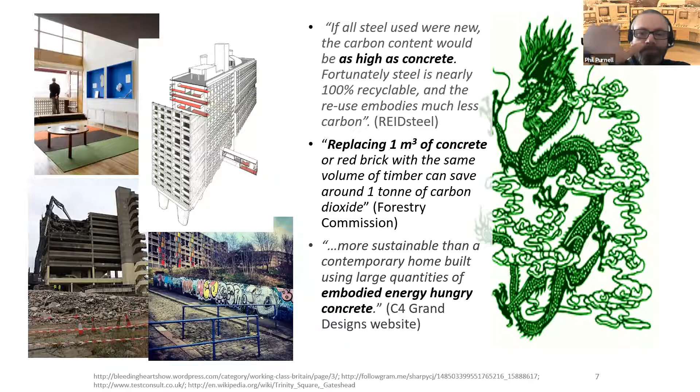So some numbers, apologies for maths at this time on a Monday morning. But if we look at all the stuff we make as a species, in the last year for which numbers are available, we made somewhere in the region of 40 gigatons of products, and that includes pretty much everything you can think of.

In the process of producing these products, we released about 37 gigatons of carbon dioxide or its equivalent in other gases. If we look at how that's split amongst the major construction materials - reinforced concrete, steel and timber - we can see that over half of that material was actually concrete. Over half of everything we make as a species is concrete, and anything made on that scale is bound to have a large footprint. We can also look at the equivalent numbers for steel and timber.

If we look at the amount of carbon dioxide emitted associated with each of those materials, we can see that although we make 22 billion tons of reinforced concrete and about 1 billion tons of steel, they release almost exactly the same amount of carbon dioxide. So although we release a lot of carbon dioxide through the manufacture of concrete, we also release an awful lot of carbon dioxide through the manufacture of steel and timber.

If you normalize these figures - the graph on the right - according to the amount that's actually made, dividing the CO2 released by the amount of material made, you can see that from a carbon intensity point of view, reinforced concrete is amongst the lowest carbon materials we use as a species, while steel and timber are very much higher carbon materials.

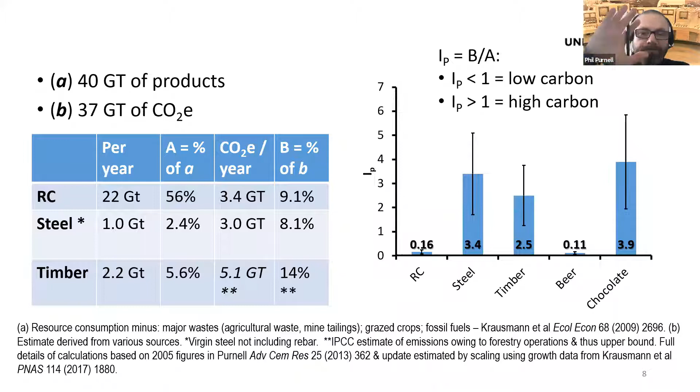The way we look at these in a more intelligent manner is to make sure that we invoke something called functional units. A functional unit simply reflects the actual function that material performs, rather than just thinking about it per kilogram or per meter cubed or per year of production.

There are some quite complicated graphs on the right here, but all they demonstrate is that it's considerably more complicated than this. In actual fact, there is no such thing as green materials, and we must look very carefully at how we use all materials.

In certain situations, for example, timber is clearly the lowest energy and lowest carbon material, and steel is not. In other structural situations, concrete is very clearly the lowest carbon material, and steel is comparable with either timber or other types of concrete.

It's a very complex situation, and if we don't analyze at the product level, at the functional unit level, any analyses we do is likely to be at worst fallacious and at best vexatious. So it's very important that we analyze at the functional unit level. There are no such things as green materials - simply by saying you're using timber instead of concrete, you are not necessarily being green.

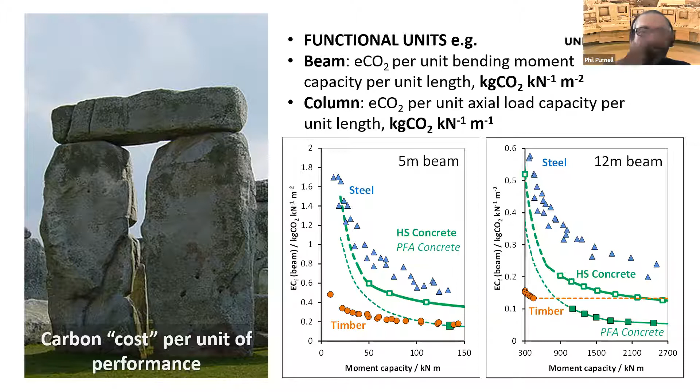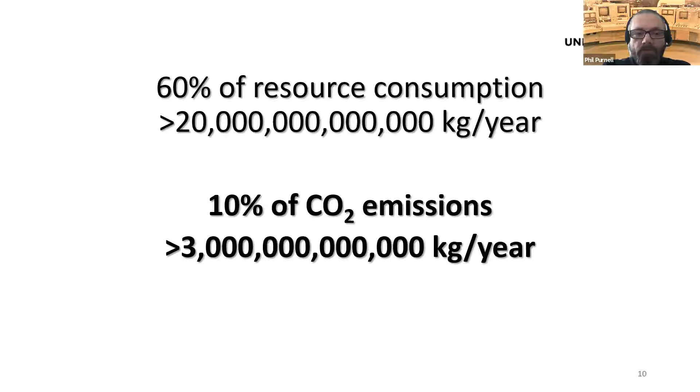Nonetheless, we must confront the gross numbers. The manufacture of concrete accounts for something like 60% of our resource consumption, and accounts for something in the region of 10% of our CO2 emissions. So regardless of what arguments we might make to say we use concrete very efficiently, these big numbers remain. Part of the job of this centre will be for Julia and her team to come up with practical and pragmatic ways in which we can reduce both of these numbers, not just the one at the bottom.

So how does this tie in with the circular economy? There's often a conception that the circular economy is primarily to do with recycling, not really to do with carbon. Well, that's not really the case. Carbon is very much tied into how we achieve a sustainable circular economy.

This process is hugely damaging. We talk about emissions from buildings, but the emissions from the materials used to make the buildings is of a similar order of magnitude. So it's important that we address it.

So what options have we got to reduce this generation of waste and depletion of resources and production of CO2? Option one is to make greener materials, and much of what we concentrate on in the concrete research industry is making greener low carbon cements. We'll discuss ways in which this can be done.

Option two is to recycle materials. This is very popular for many other materials and can be very effective, such as aluminium and steel. But it doesn't solve the problem because recycling itself is not energy free, and it doesn't address demand and consumption. You very often see in these systems considerable rebound effects.

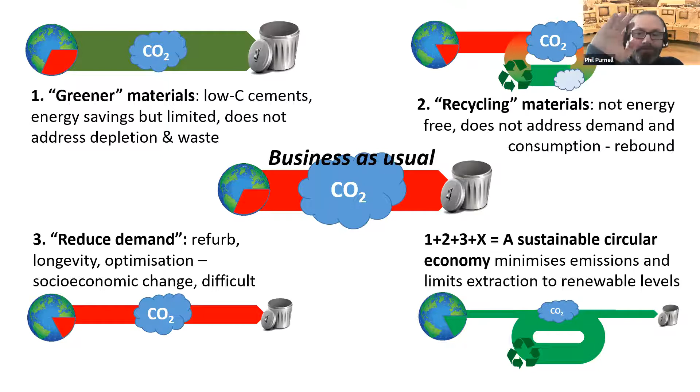Let's have a look at some of these in turn. So how do we go about less embodied carbon? Well, one way, of course, for many other materials is to use less energy.

But one of the fascinating things about cement manufacture, and by extension concrete manufacture, is it's already very close to its theoretical limits. If you do the enthalpy calculations for cement manufacture from its raw materials, you get down to about 2 gigajoules per ton. We're already very close to that. Because the process operates at such a scale, it's already been optimized very, very heavily.

Of course, the other half, or just over half, of the CO2 from cement manufacture comes from decomposition of limestone. So can we look for materials that aren't carbonate bearing in order to make cements with different chemistries? Because we know these cements exist - other calcium cements, calcium sulfate cements, calcium aluminate cements, and cements we can base on magnesium.

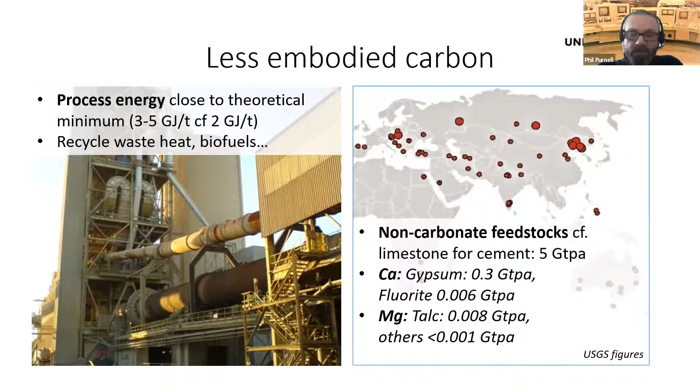But when we look at the proven reserves for the base materials, so after limestone, the next biggest calcium mineral is gypsum, and the next biggest is fluorite. These are produced at scales orders of magnitude below what we actually need to maintain cement and concrete production. So while these are useful clubs to have in the bag, they are not the whole game.

We're also very keen on adding things like PFA and GGBS. So we take other people's wastes where somebody else has already been made responsible for the carbon, and we mix this with our cement. This basically dilutes our cement and very effectively reduces the carbon footprint of the cement and the concrete, and also adds technical benefits as well.

But it's important for us to remember that the parent processes for pulverized fuel ash and GGBS are changing, and they're changing in ways that are actually reducing our ability to reuse PFA and GGBS in concrete.

We also need to be cognizant of the fact that these materials are only low carbon because of accounting factors. They're not low carbon inherently. It's just that we assign the carbon associated with their manufacture to their parent materials. Relatively small changes in that allocation could actually very quickly make PFA and GGBS effectively have as high embodied carbon as cement, or very close to it. So again, this is part of a solution, but not a whole solution.

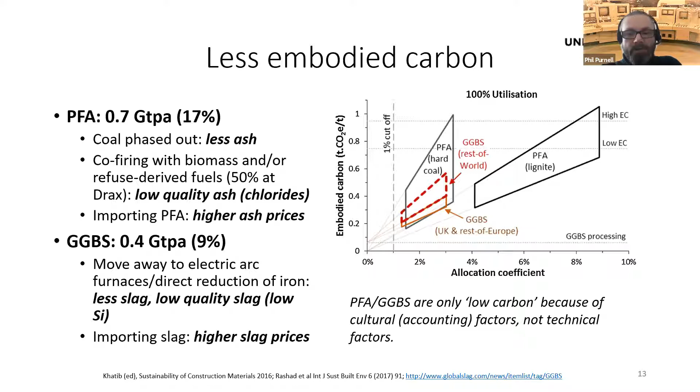We can look at the concrete we make already. Leon and I did some work over a number of years to look at how the embodied carbon of concrete varies as you change the mix design, without needing special cements or anything else. You can optimize your concrete mix quite carefully to get large reductions in CO2 without using new cements or replacement materials that can be difficult to get certification for. Thinking more carefully about how we use the concrete we specify can give us considerable savings, combined with savings we've spoken about before.

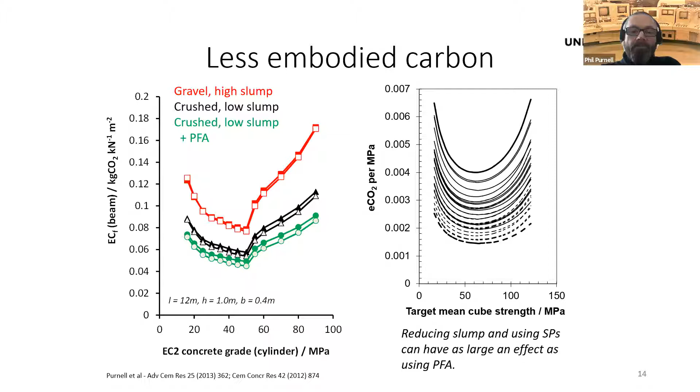Another thing we can do is simply use less concrete. So moving from option 1 to option 3 that we put on the earlier slide, how do we actually use less concrete? How do we reduce the demand for concrete?

One thing we can do is look at the concrete sections we actually build. Many of us will be familiar with instructing undergraduates how to make a reinforced concrete section. They take a loading situation from which they gain a bending moment diagram, look at the peak on that diagram, and design a section which resists that peak moment. Then we make a prismatic beam, designed to resist the same moment all the way along.

A very simple calculation demonstrates that if you optimize the depth of that beam to match the bending moment along its length, you can instantly save something like 20 or 30% of concrete. Put another way, 20 or 30% of the concrete in that beam isn't actually doing any work. It's just there because it's easier to make the beam that shape.

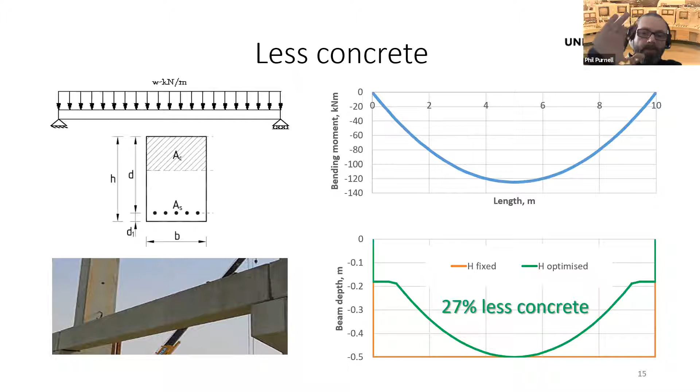And of course, we didn't always do this. This is not just a technical issue, it's actually an economic issue. If we go back to the early and later 19th century, it was perfectly common to design the shapes of beams such that their shape reflected where the bending moment is in the beam. If you look at structures from this period, you often see these 'hog's back' beams, as they're sometimes called. Why don't we do this now?

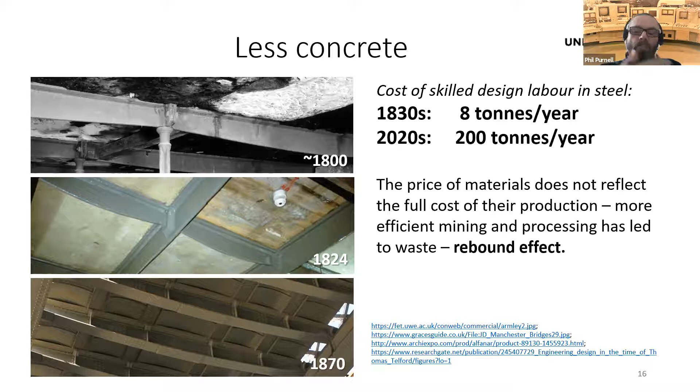It's because of the change in the ratio between the cost of skilled labor and the cost of materials. In the 1830s, paying the equivalent of a relatively newly graduated engineer would cost about 8 tons of steel a year. Nowadays, that would cost about 200 tons of steel a year to match their wages. This means the price of materials nowadays does not reflect the full cost of production. So more efficient mining and processing, rather than leading us to use less material, has actually led us to use more—a classic rebound effect.

Another thing we can do is look more carefully at how we reuse buildings themselves. Rather than constantly moving to new build, demolishing and rebuilding, let's look at what happens if we refurbish existing buildings. There's a big push towards so-called zero carbon buildings, which generally involve knocking down what's already there and building a very heavily insulated, carefully ventilated building. But although that saves on operational carbon—heating, air conditioning, lighting—it incurs a cost in new materials that have to be mined out of the ground.

When you look at the total carbon emitted over the lifetime of those buildings, the picture doesn't change very much. In fact, the jury is largely still out on whether it's more carbon efficient to refurbish existing buildings—saving on embodied carbon but losing a bit on operational carbon—or to build new buildings where the converse is true. So in the absence of other information, since we can't make a simple heuristic decision, as someone said before me: the greenest building is the one that already exists.

We should be pushing our materials towards those which help us refurbish our existing built environment, rather than digging new materials out of the ground and emitting more carbon to build a new built environment. Durability and maintenance are therefore key enablers for a circular economy. Building new buildings is sexy, but it costs a lot of carbon. Understanding how to do durability and maintenance is going to be a key plank in moving towards a circular economy.

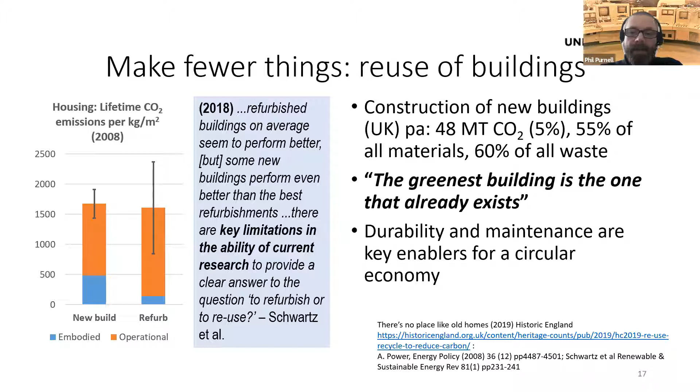It's silly season at the BBC, so this comes around once every 4 or 5 years. Many of you will have seen this report over the last few years, and they always illustrate it with this idea that somehow the Romans had a magic formula for concrete which, if only we could rediscover it in some fantasy novel narrative arc, we could make buildings that last forever. People should be alerted to the classic case of the US Naval Air Force reinforcing their planes and being told about survival bias.

We don't need to invoke magical materials. We have had, for many years, this is a graph from 1998, the design procedures, the technology, the knowledge of the material science and the chemistry to actually make sure that reinforced concrete buildings we specify nowadays are perfectly capable of lasting 200-300 years if they're properly maintained and properly designed.

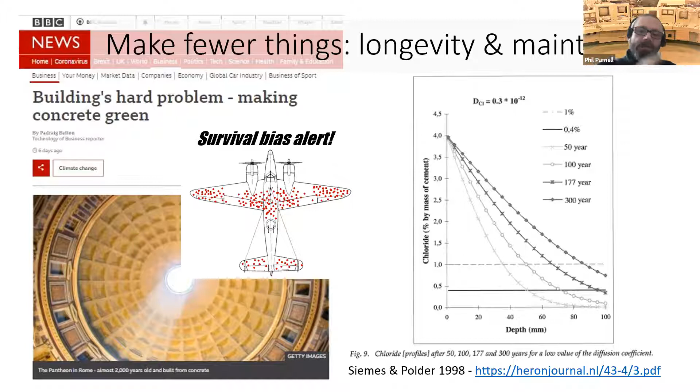One of the things we also perhaps need to move towards, because there will be times when we need to demolish existing built environment to make new built environment, is looking at ways we can reuse the components that make up our buildings. Because the value of the materials we use is not in their materiality, it's in the function they provide - their ability to resist axial load, their ability to resist bending moment. Understanding how we can reuse construction components, not just crush up and recycle construction materials, is going to be essential to moving towards a truly circular economy in the built environment.

For concrete, particularly cast in situ concrete, this is an Achilles heel because it's very difficult to dismantle and it's very difficult to understand what the properties of the sections are. I can tell you the properties of a steel I-beam with a tape measure and a textbook, but it's much more difficult to do that with a reinforced concrete beam where the steel is embedded in the concrete in ways that are very difficult for us to analyze.

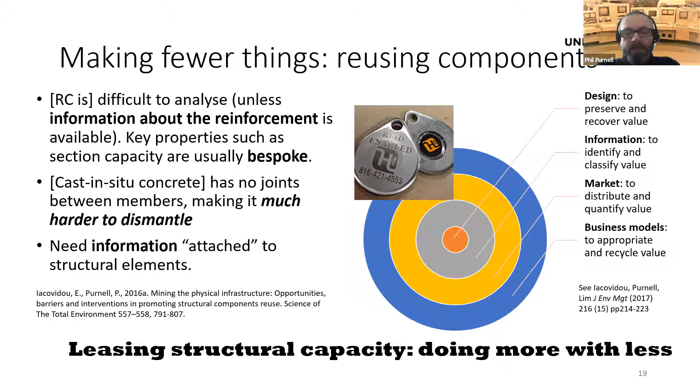In actual fact, the value in those reinforced concrete beams then switches towards the information we hold about these components, and how we can add value to them by understanding their residual capacity - so we could recover some of that high level structural value, instead of crushing it into aggregate to recover only some of that relatively low material value.

So that's a whistle-stop tour among some of the high level stuff that Julia asked me to address. The short answer is all of these things are equally valid - there is no silver bullet to moving towards a truly sustainable and circular built environment. But by looking at ways we can combine all of these different approaches, in a sort of British Cycling Federation approach where we make multiple incremental improvements, but also pushing the agenda much more strongly towards reuse and refurb rather than recycle - these are the ways we'll move to something approaching a sustainable circular economy for construction.

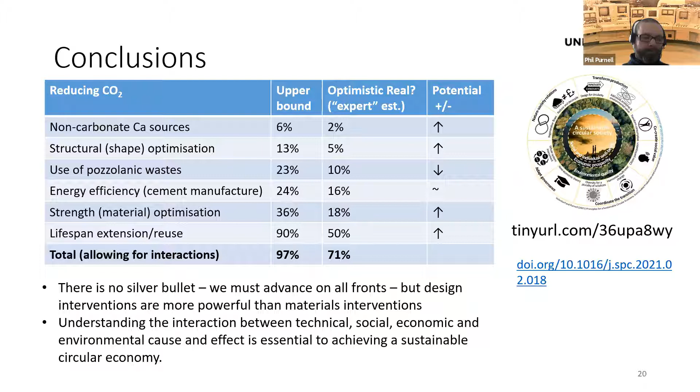There's a question: do you think there is a case for bio-based aggregates? That's an interesting one - I don't know is the short answer. There's always a case for these things, it's a question of whether we can actually make the case. My personal opinion is we probably have much better uses for many biomaterials.

So for those on the first launch this morning, there are ways we can add value to bio-based materials, making textiles, biofuels, depending on whether you think they're higher value. Some of the chemistry involved in making bio-based aggregates compatible with the highly alkaline environment within concrete probably means it's not the best use of biomaterials. Having said that, for many years people have used biofibers like jute and flax successfully in many countries to make lightweight concrete sheets. So there's always a case, but it's important to make the case based on a functional unit, not a heuristic. I hope that answers your question.

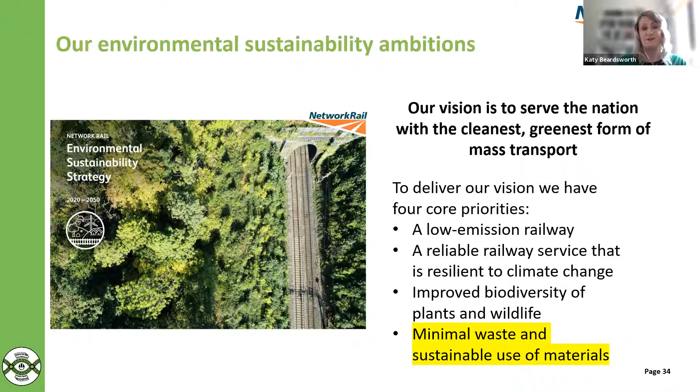We have some national functions or national service areas that cover the whole of the business, and I sit within one of those, a technical authority. So we have overall responsibility for policy, strategy, and several other areas.

Our business is devolved into regions. These regions run the railway day to day and also their own autonomous businesses as well, with interfaces with the national services. And at each level within the business, we have an interface with supply chain.

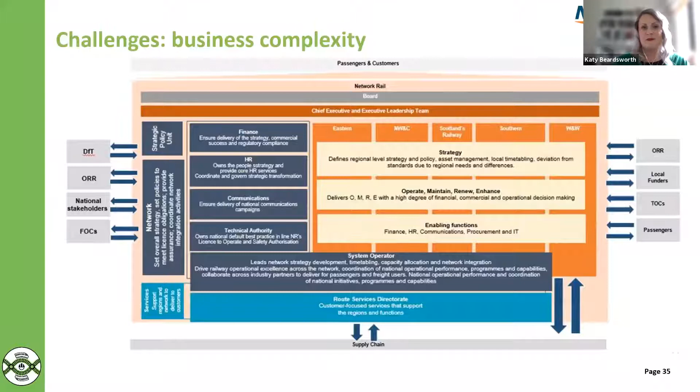So trying to change anything, update or innovate involves a lot of cross-functional working right across the business. It's very, very difficult to understand who you need to speak to, and at what point you need to speak to them. So there's a lot of challenges internally making that work.

Also, our business's understanding of circular economy. Probably even the wording we've ended up using in our strategy doesn't help awfully, but when you bring circular economy up generally within the business to people outside of sustainability, you either get a blank look or they say, oh yeah, you've got to recycle more.

Obviously this is one area of circular economy, but ideally the last thing we should be doing is once we've done all the other steps and identified all the other areas. So I think we've got quite a big internal education piece to do to help our business understand what circular economy is, what it means for them, and what opportunities they have within their roles to start embedding these principles.

And a big challenge, possibly our biggest challenge, are our safety specifications, standards and approvals process. So obviously building railways, we have materials we need to use and they have specifications, and to change anything within this is quite a formal process you need to go through for most of the materials or processes we'd want to change.

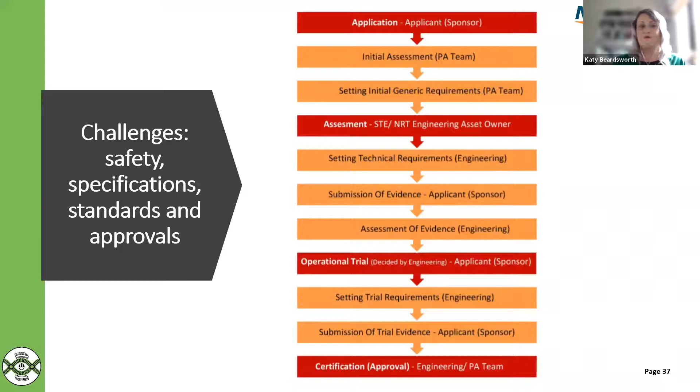So if we're identifying through our circular economy research that we should be using different materials or doing things in a different way, it's not going to be a simple case of, okay business, let's just crack on and do it. There will be many hoops to jump through before we get there.

And hot off the press last week, just to throw another complication in the works, the Williams-Shapps Plan for Rail was released. This is a rail review that was supposed to be published last year, but COVID put it back, and I think it's had quite a few rewrites.

But this basically sets out a vision to fundamentally change how the rail network works. In a few years' time, Network Rail will no longer exist. We will be brought under the umbrella of a new business called Great British Railways, and this will mean changes to probably everything that we do in the way we do things.

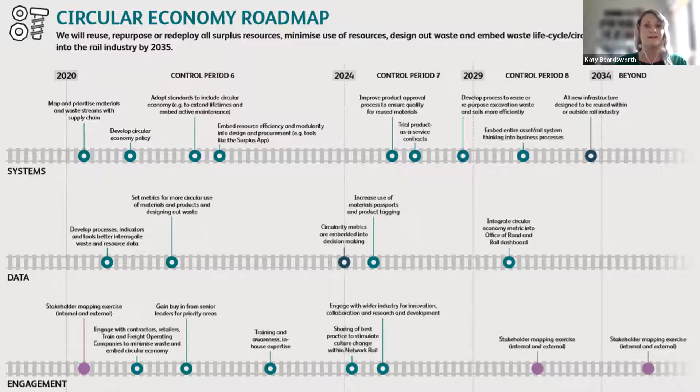So we've got quite a few things we need to do before we can get to that stage. We've got to map and prioritize our materials, and do a lot of work with the systems and processes we currently have to update them. I see a lot of opportunities with what this centre is trying to do in helping us along that journey.

So for my last slide, I wanted to touch briefly on some of the projects we're extremely keen to get involved with. We've had conversations with the project managers and people running these projects, because honestly, I see opportunities and possibilities with all the projects this centre is running, and I think there's going to be some really great stuff coming out of it.

But for these three in particular, Project 1A and 3D, we're hoping to be industry partners for and really embed that learning into our business. And with the eco-design of infrastructure, tunnels and bridges, we see a lot of overlap with what we're trying to do. So I think the centre itself is going to be a massive help to industry.

I think having industry partners is really key and a great way to do it, because it means we're not going to end up with some academic research that's published and nice, but really hard to translate into how we can use it in a business. It will hopefully be very much a collaboration approach, which means we've got the case study and information there to move forward with it as a business.

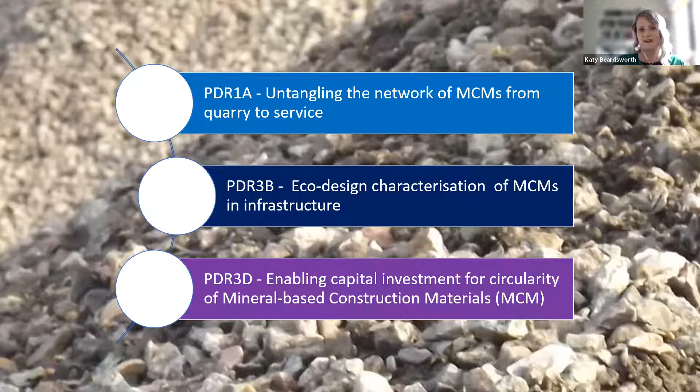So I'm really excited about the opportunities and what we can do together with this centre. And thank you, that is me. I'm happy to take any questions.

Right, thank you very much, Katy. It's a very interesting presentation looking at Network Rail and the circular economy roadmap. We're very delighted that Network Rail is part of the centre and working together specifically on the project she mentioned.

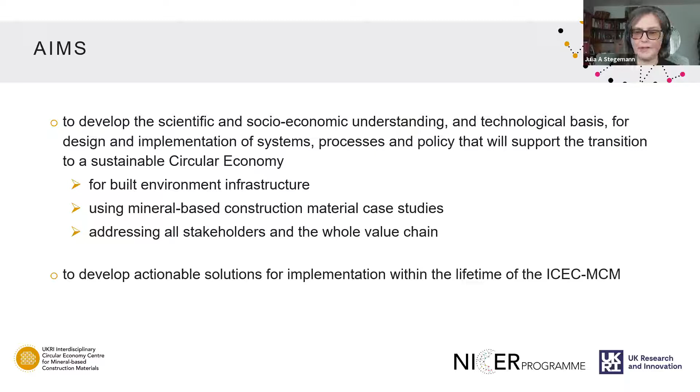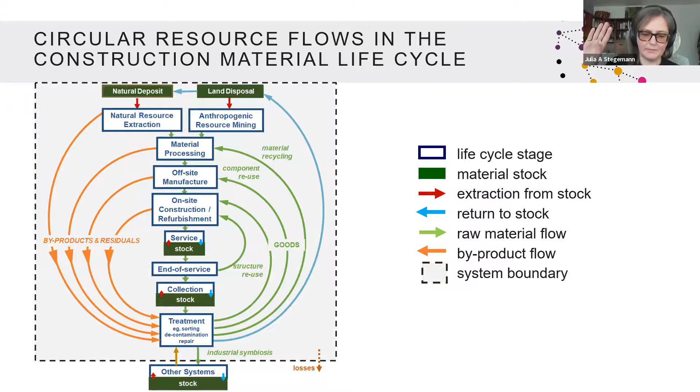Our research is organized according to 3 challenges. Challenge 1 is looking at material stocks, flows, and impacts, which relates to the arrows and green boxes in the previous diagram - the raw materials and the wastes.

Challenge 2 is the blue boxes in the diagram, looking at technical understanding and technical innovation for mineral-based construction material demand reduction, circularity, and impact reduction over the whole life cycle, for all of the life cycle stages.

Challenge 3 is about systemic enablers for circularity and addresses the whole system inside the black dotted line in the diagram. So I'm going to tell you a bit more now about challenge 1, and then Leon and Mohamed will tell you about challenges 2 and 3.

The research questions for challenge 1 are: what are the material flows and stocks of importance? Where are they located? What are their quantities and characteristics that we need to know in order to develop a circular economy with them? And what are their economic, social, and environmental impacts? We also need to know how these aspects change over time and in response to interventions we might make, which could be technologies, policies, or regulations, intended to stimulate a circular economy.

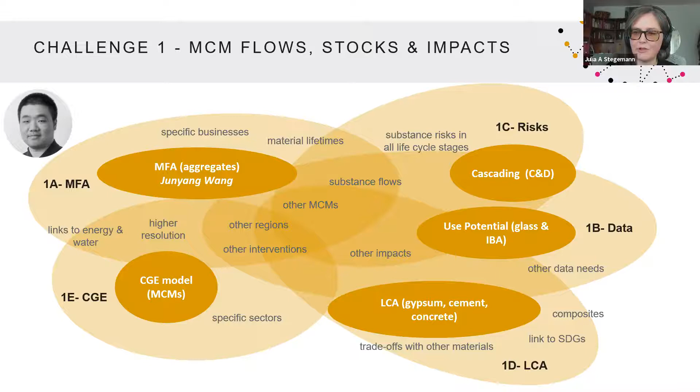Again, keeping with the idea that there are 5 research projects within this challenge, we've tried to span the entire lifespan of a piece of infrastructure, from design, project 2A, through the materials we use, then onto manufacturing and construction processes, in-life performance, service performance, and end of life, end of service. So we can consider this linking back to Phil Purnell's presentation.

We're looking at new materials and new construction processes to make the materials greener. We're looking at recycling materials, so that's the end of life, and how can we reuse the materials. We're looking at lengthening the lifespan of structures, therefore reducing demand, all via design and build processes.

So the 5 projects: 2A, Shoma Kitayama, based in Leeds, looking at design of circular gypsum panels for facades, and how you design the joints and fixings that allow these - not so at end of life you just come in with a wrecking ball and knock everything down, but to disassemble and reuse.

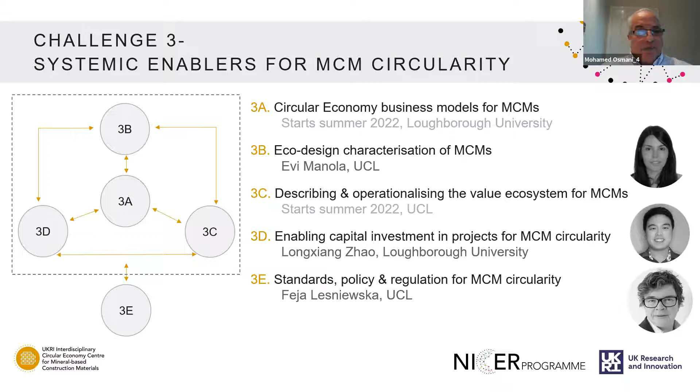We also have some associated researchers from around the UK and internationally who are working in this area, and they'll be linking PhD students to the program of work we're going to be doing.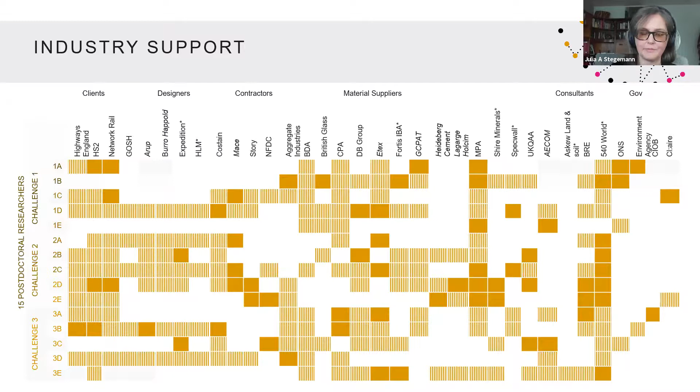So in summary, here's the structure of the centre. We have the 3 challenges we just described, associated with 25 co-investigators and 15 postdoctoral researchers supported by core UKRI funding, with industrial placements funded by industry. There'll also be at least 20 PhD students funded by the universities with matched funding from industrial collaborators, as well as PhD students from the associated research centers, and MSc students from all of those different academic organizations.

Then we have this stakeholder interest group, and we have an equality, diversity, and inclusion working group, and a knowledge mobilization and exchange team who will interact with the wider landscape.

One of the really key aspects of our structure is this independent advisory board, where we'll get input from government and UKRI and the circular economy hub, who's coordinating the activities of the 5 circular economy centers that are part of this program.

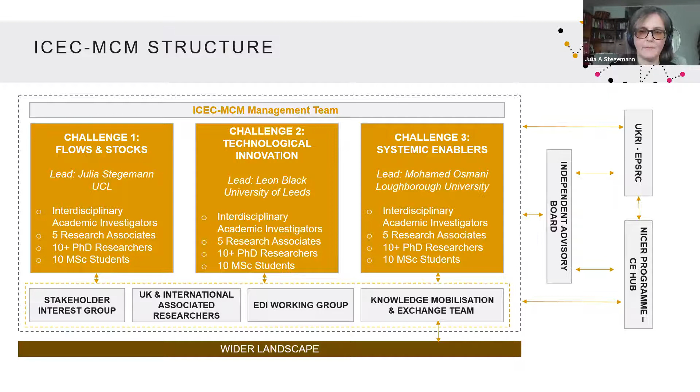We've divided these cross-cutting themes into goals, transition tools, and impacts, where goals are circular economy principles, sustainable development goals, and resilience. Transition tools are metrics, standards, education, behavior change, digital innovation, and industrial symbiosis. Impacts are virgin materials demand, greenhouse gas emissions and energy, natural capital, social impacts, business impacts, and policy impacts.

I think something quite important to recognize is that the impacts are not limited only to greenhouse gas emissions, which are definitely one of the chief problems of our age and for future generations, but so are all of these other things listed for our impacts.

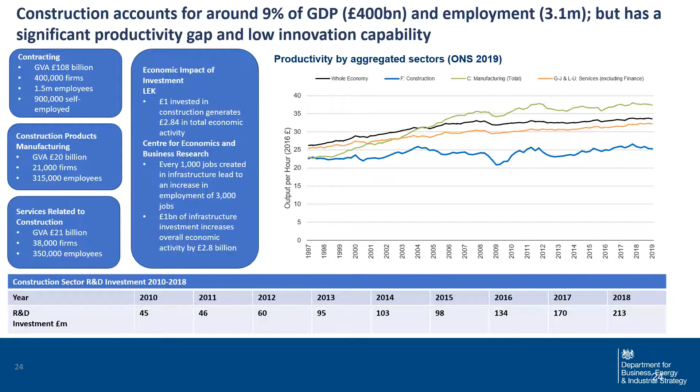And the scale of the carbon challenge is significant. The built environment accounts for around 40% of UK emissions every year, or 350 million metric tonnes of CO2. This is accounted for by a number of different things — both the embodied carbon which exists in the built environment, and the operational carbon linked to the operation of buildings, to the creation of new buildings, and to the way people use them. So you have about 22% of UK carbon being embodied carbon within the built environment.

There are some other very significant contributors to the level of carbon emissions from the industry. Around 48 million metric tonnes comes from new construction related activities, of which over half relates to products — typically the energy intensive products the sector uses, so concrete, steel and glass. Whereas only about 20% of these emissions is actually linked to on-site activities. Although, because of the volume of construction products and materials shifted around the UK to build things, around 10% of construction emissions come from transport and logistics. So by reducing the volume of products used, using them more efficiently, recycling them close to where they're used, or finding ways of reusing buildings, you will have a significant impact on those emissions as well.

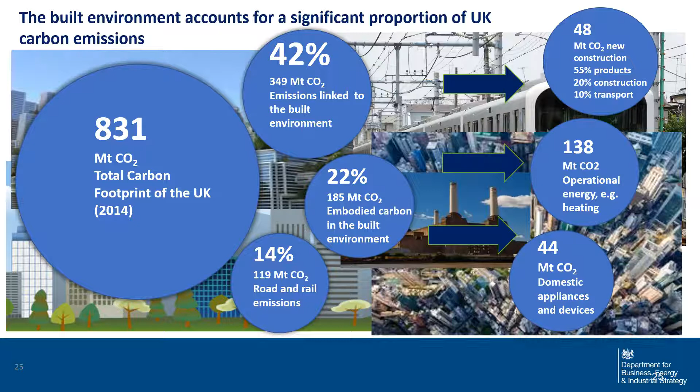Moving on to the next slide, the UK government has set a pathway to net zero carbon by 2050, and we are well aware that the built environment is a key sector to this, and one of the sectors whose emissions we have to reduce dramatically.

The trajectory, which is going to be incorporated into law, is for a 68% reduction in UK carbon emissions using the baseline of 1990 emissions. We will be aiming to get that up to 78% by 2035, and these are critical steps if we are to achieve net zero carbon by 2050, and also make the contribution we need to make to holding climate change and the increase in global temperatures closer to 1.5 degrees Celsius than 2 degrees Celsius, which most experts think is what we should be trying to do.

In terms of what that implies for the industry and what the priorities need to be, we are following very closely the recommendations of the Climate Change Committee, who've identified key areas including decarbonising residential heating, reducing the energy consumption of buildings, decarbonisation of industry—both manufacturing and construction plant, through electrification or hydrogen for larger equipment—and a significant reduction in vehicle emissions from heavy goods vehicles, vans, and other transport the industry uses.

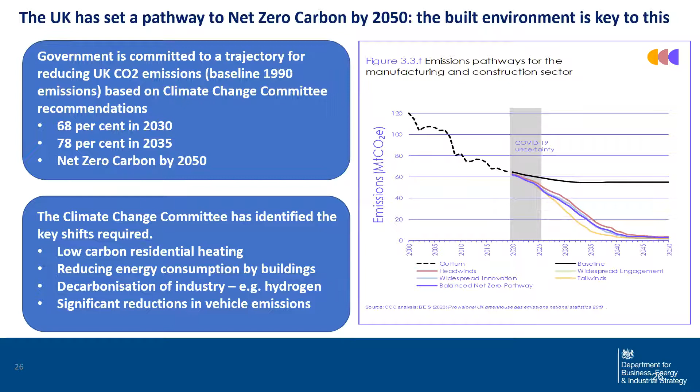Moving on to the next slide, reducing carbon emissions is also one of the objectives of the Construction Playbook, which aims to reset the relationship between the industry and government to make it more strategic and less transactional. What we mean by more strategic is that we want the industry to focus on what it can contribute to delivering strategic policy objectives the government has set.

That includes improving the productivity of the industry and making it more efficient and innovative. It also includes improving building and workplace safety following the Grenfell Tower fire. But importantly, it also means contributing to environmental policy goals, including the transition to net zero carbon, reducing particulate emissions, promoting biodiversity, and delivering greater social value—providing training or long-term sustainable employment for disadvantaged groups or less prosperous parts of the UK, including access to jobs likely to be sustainable long term, such as construction retrofitting or other jobs linked to making the industry greener.

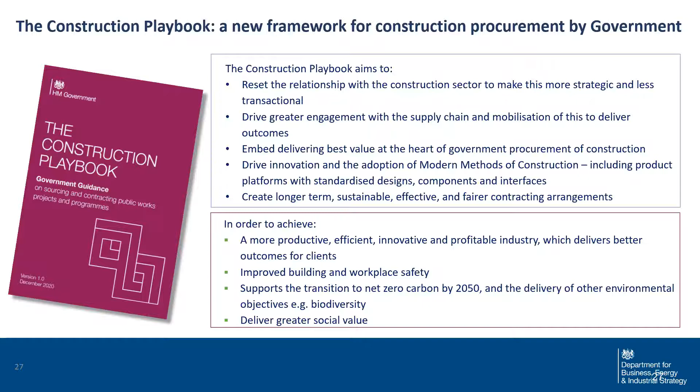Moving on to the next slide, one thing we've been investing in over the last few years is the Transforming Construction Challenge, a £420 million public-private sector investment aiming to improve the industry. The strategic objectives are a 30% reduction in whole life costs, primarily through driving efficiencies and productivity gains. We also want to increase the speed of project delivery by about 50%. But more importantly, we want to reduce by 50% the carbon emissions at all stages in the building's life cycle—that's the embedded carbon as well as the operational carbon emitted.

We've invested in a number of projects, initiatives, and research infrastructure to contribute to that. We've put £72 million into the Construction Innovation Hub, developing digital and off-site manufacturing technologies. We've also invested £36 million in the Active Building Centre at Swansea University, developing technologies that generate and store energy and heat, incorporated into the fabric of a building—in crude terms, turning the building into a power station.

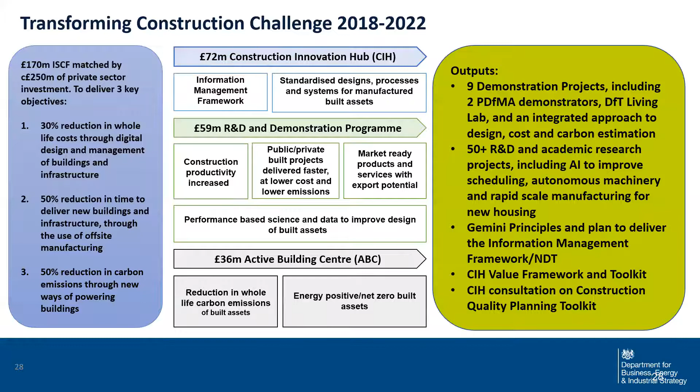We've also been supporting demonstration projects and R&D and academic research projects, including some aiming to better understand the amount of carbon embodied in infrastructure and buildings and generated during their operational life, as well as trying to reduce the quantity of materials used and improve the processes for creating buildings.

Moving on to the next couple of slides, there are a number of projects I wanted to highlight as examples relevant to the work of the centre. For example, the Transpark academic research programme looked at business model innovation in the parking sector, exploring how to transform these often fairly monolithic concrete blocks in our city centres into hubs that can generate and store electricity, act at the heart of electric vehicle charging networks for cars, vans and delivery vehicles, and help better integrate systems within the built environment. This was inspired by the thought that demolishing and removing these buildings would have significant carbon consequences—it would be much better to reinvent them and reuse them to contribute to a lower carbon future.

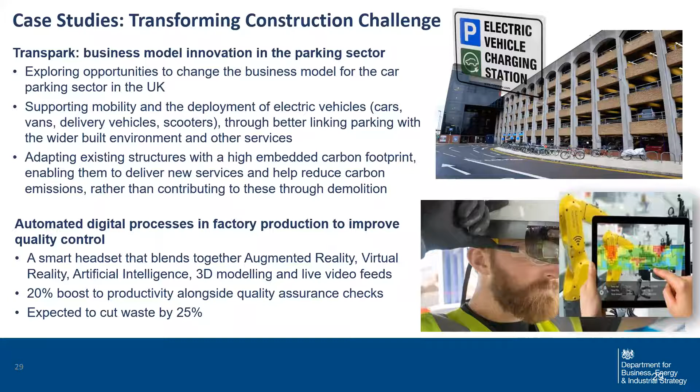The second project to highlight is automated digital processes for improving production in factories. This is about quality, but also sustainability—we're expecting this to improve productivity, but also to cut waste generated through industrial processes by around a quarter.

Moving on to the last couple of case studies, one other project is a smart digital platform we've been developing to map the most efficient programme plan and help improve the productivity and operation of the construction supply chain. We think this will have a significant impact on cost, reducing timelines and improving overall productivity.

And it will also have important sustainability benefits because you are maximising the efficiency of the supply chain. And then finally, this is one of our flagship initiatives being worked on by the Construction Innovation Hub: a product-based approach to design and construction, where we take the model developed in the automotive and aerospace industries of a product platform, with a set of component parts with standardized interfaces and connectors that you can then manufacture.

By applying this to building types like schools, certain types of accommodation, or hospitals that we produce a lot of, we think we can significantly reduce the amount of carbon that's both embedded in a building and which it generates through its operations, mainly by using less materials and designing and building a much higher quality, more energy efficient building.

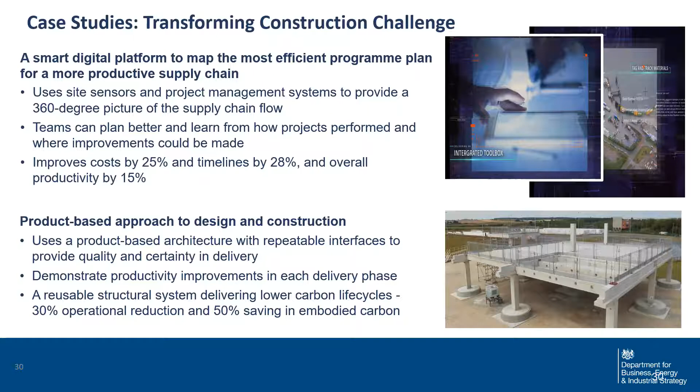So I will conclude there. Thank you for listening. Apologies that I was not able to join you via the Zoom call and you weren't able to see me. But hopefully I've given you a bit of an insight into the overall direction of travel for government policy, but also some of the issues and initiatives that we're actively working on at this point in time.